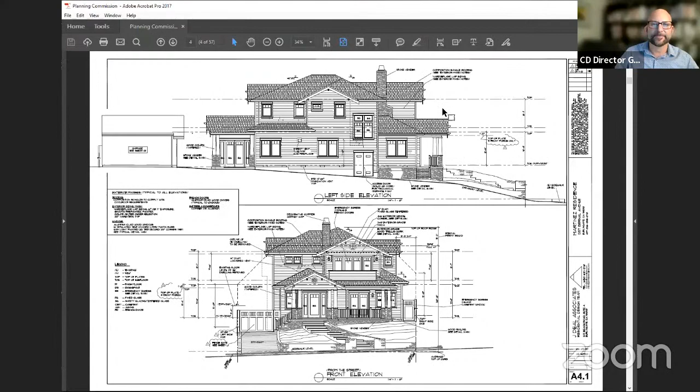Great, do we have any questions, commissioners? Okay, seeing none, then I'll go ahead and open up the public hearing. Would the applicant please come forward and state your name and anything else you'd like to add about your project?

Chair Schmidt, it appears that the applicant is not in attendance. Okay, if perhaps the property owner is available, if he can raise his hand. But I don't see anybody.

So, oh, did I see it? No, it was just my one microphone. Okay, well,

From memory of last meeting, we didn't have a whole lot of concerns. We had some minor comments which were addressed. Unless somebody's feeling like they have a burning question for the applicant that isn't here, can we not move forward and make a motion on this one anyway?

That's correct, you do still want to check to see if there's any members of the public, but then you can close the public hearing.

Okay, so since we do not have the applicant in attendance, if there's anyone else who wishes to speak on this item, please raise your hand now. Otherwise, we'll close the public hearing. Okay, not seeing any hands, I'll go ahead and close the public hearing.

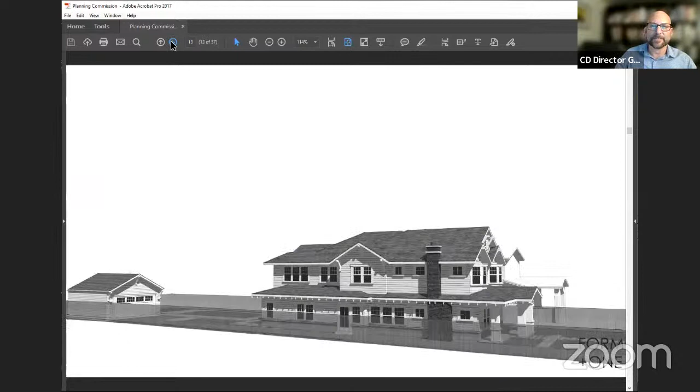The applicant proposes to replace the existing two-story single-unit dwelling and detached garage at 121 Occidental Avenue with a new two-story single-unit dwelling with a detached garage. The property currently contains a swimming pool that is proposed to be retained and refurbished under a separate permit. In summary, the applicant is requesting design review for a new two-story single-unit dwelling and detached garage. The applicant is available for questions, but first I'm available for questions of staff.

Okay, do we have any questions for staff at this time? Commissioner Gall: I know it was not included in the floor area calculation, but the attic clearly has a ridge height of close to 8 feet and a lot of space up there that's over 5 feet. Is that not included in the FAR?

I'd want to look at the exact plan check. Generally, if the lowest parts are not counted, and then if there's any part of the height that is... I'm blanking on the ceiling height threshold when we start counting, but parts of that would not be counted.

Yeah, I was just looking at the section on sheet A4.0. It looks like a big room up there to me, but I don't know if that should be counted, or if it, I don't think it was counted.

If I may say, generally we don't count attic areas unless they're accessible from the interior with a permanent stairwell and they're more than 5 feet in height. Would that include a pull down stair? No, if there's a pull down stairs, it does not get counted. It has to be a permanent stair. Okay, thank you.

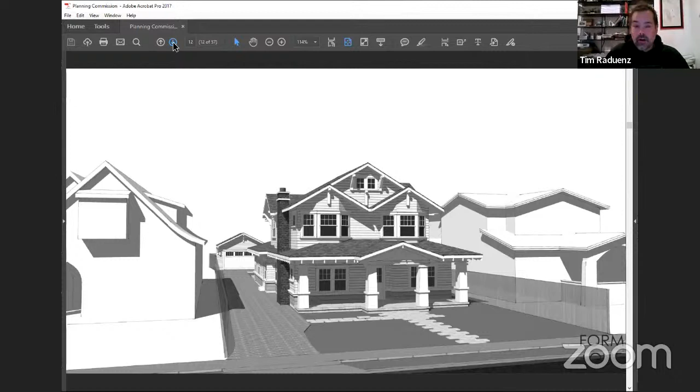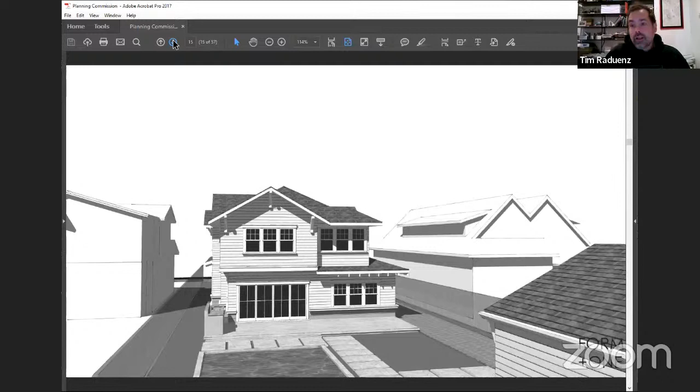Neighborhood outreach has reached all the neighbors connected to this property. We haven't gotten any negative feedback. I'll just kind of give it up to the board for your comments, and we'll come back with a better submittal next period. And to comment to Commissioner Gall, we'll draw that attic as an actual truss.

Normally we put the furnace in there because that's a good space for it, but we'll show it as per the city regulations. Currently it's not included, and it will not be a finished space, even though you do see that there's windows up there. That's more of an architectural look that we're trying to obtain.

Lastly, we're trying to keep the pool existing. We would definitely refurbish it, but a main selling feature for this house is that pool. So, if you have any questions, I'm here to answer them. Thank you very much.

Great, thank you, Tim. Do you have any questions for the applicant at this time? Commissioner Gall: Yeah, thanks, Tim. I did see that you had it look like the furnace and the water heater under the stair landing. So that was kind of... Well, yeah, we would do two furnaces, one for the upstairs and one for the downstairs. Okay, so you don't have problems with dampering on the zones. Right. Okay, no, that's fine.

Actually, my main question is on the landscape or the site plan. The interesting lot that it had garnered a little bit of that back space, but my question has to do with the neighbor in the back. Are they actually... I'm not sure if I'm reading the plan properly, but is the fence going to stay where it is, or is the property owner, your client, going to give up that 5 feet or so that goes in a triangle on the back? Because there's a planter back there.

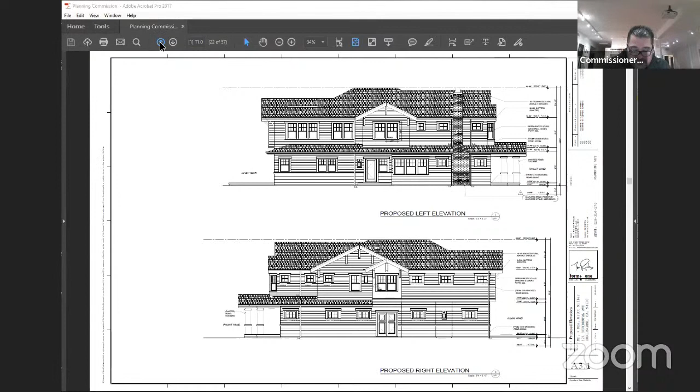My other question is, if we could look at the front elevation and compare it to the rendering - I'm looking at the attic windows in that gable. What's shown on the drawings seems a little fussy, but what you had in the rendering is better because the windows are a little wider and more square. They look like attic windows. My fear is the narrow windows shown on the proposed front elevation - by the time you get that from the window manufacturer, they're talking you out of making those windows that narrow, and something changes. The way you have them here, they're a little bit wider.

Definitely the 3D version is better. So if you could take a look at that and revisit it. The other thing is it's looking really fussy with the 3 knee braces - I don't know if it needs that much work, it looks like it's trying really hard. In my opinion, 2 knee braces on either side of the windows are sufficient. If you could take a look at that when you revisit the window sizes, I think these square ones like on the rendering work best, but I'll leave it to you to revisit.

Thank you. My one last comment is I'm really impressed with the front porch and those porch columns that are really substantial. Looking at the plan, I'm assuming they're about 1'9" square, which I think is great. I think it's important for the impact of the front porch to have enough gravity relative to the upper floor, so I really hope that detail sticks with those front porch columns. That was it for my question.

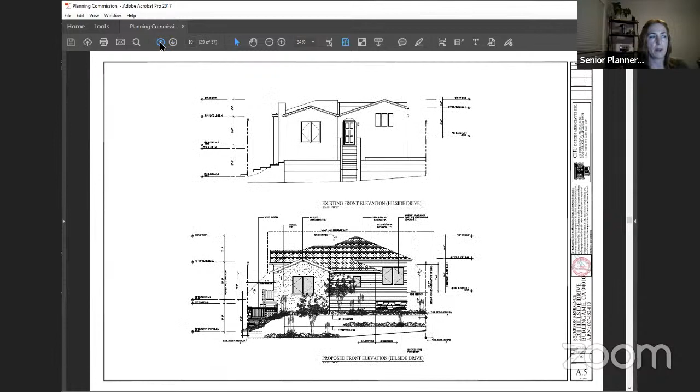The applicant is also requesting a variance for a proposed front setback of 15 feet 4 inches, where the required front setback is the average of the block, or in this instance, 20 feet 1 inch. The proposed project includes an attached one-bedroom ADU at the rear of the lot, and both new entries for the main dwelling and the ADU will face DeSoto Avenue. That concludes the staff report, and I can take any questions.

Great, thank you. Do we have any questions for staff at this point? I have a question: given that the entrance is now moving from Hillside Drive to DeSoto, does that change their address, or how does someone know they're on Hillside Drive and where the address is located? Yes, the ADU will be required to have the same numerical address but alphanumerical, with an A after the address, and Public Works will require they change the address to DeSoto Avenue for both the main unit and the ADU. Okay, then the location of the address will be fine. Okay.

Then if we don't have any further questions for staff, I'll go ahead and open up the public hearing. Would the applicant please come forward, state your name, and tell us anything else about your project? Hi, James Chu, Chu Design Associates. We actually already applied for a street address change with the Public Works Department, so the new address will be on DeSoto. This is a major improvement to an existing two-story.

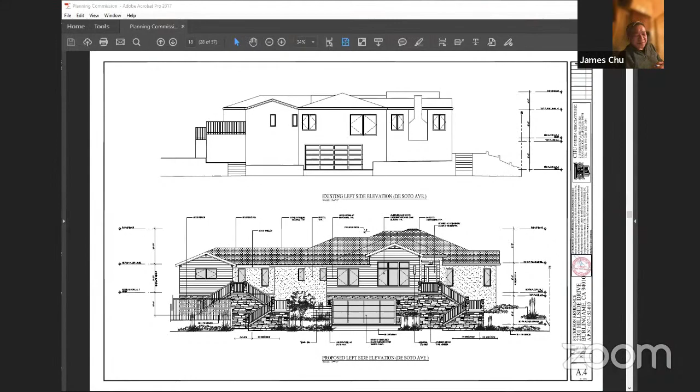Commissioner Tse. Oh yes, hi James. Just a question about the northeast corner of the lot, near where the ADU is, there's a series of trees there, and I don't see anything in the report about what's being proposed for the trees, whether they're being removed or maintained and built around. Can you shed some light on that?

So I see, what is it, the site demolition plan. I see there's a removal of one tree. Oh right, but there's a whole cluster of trees there. I don't know, is it a multi-branch singular tree? It's quite thick and dense in that corner. It's somehow not showing on my plan, but I think our intention is to keep them.

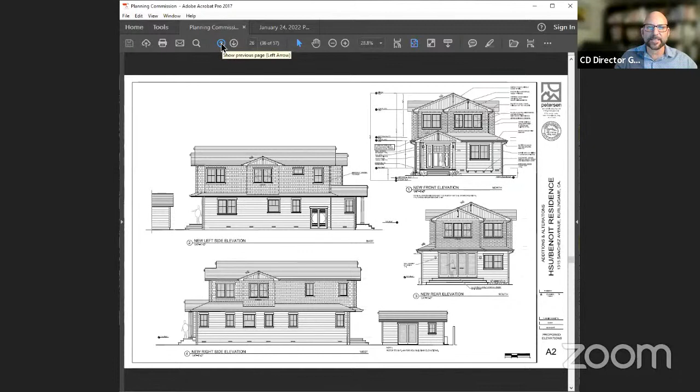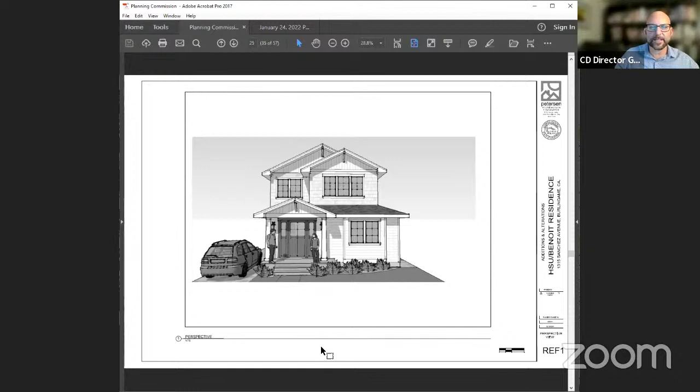Prior to the action hearing for this project, the architect will revise the plan to include one additional 24-inch box landscape tree within the property boundaries. As a reminder to the public, review of the ADU application is administrative and not subject to review by the Planning Commission. Staff has determined that the ADU does comply with the city's ADU regulations. In summary, the applicant is requesting design review for a new two-story single unit dwelling. The applicant is in attendance to answer questions, but first I'm available for questions of staff.

Great, do we have any questions for staff? Okay, seeing none, I'm going to go ahead and open up the public hearing. Will the applicant please come forward and state your name and anything else you'd like to add about your project?

Hi, good evening. My name is Tim Petersen with Petersen Architecture.

Our project is a 40-foot wide lot, 1315 Sanchez Avenue. It's in a neighborhood of 1- and 2-story residences. I'd say the primary character of those houses in the vicinity of our project are craftsman bungalow style. Our intent is to create a house that blends into the neighborhood and meets the program requirements of my client, their growing family. I'm here to answer any questions.

Great, thank you. Do you have any questions for the applicant at this time? Okay, I do have a question.

Can you please clarify the fence along the left side driveway? Today there does not seem to be a fence going most of the way back, and I can appreciate the use of the easement there. But I wasn't able to tell from the drawing whether the intent is to put a fence back along the driveway or not. The intent is to move the fence to the property line. It's in the 10-foot utility easement, which is on the left side of the project, so we're required to move it by Public Works back onto the property line. So what you saw when you made a site visit, it will slide over to the property line.

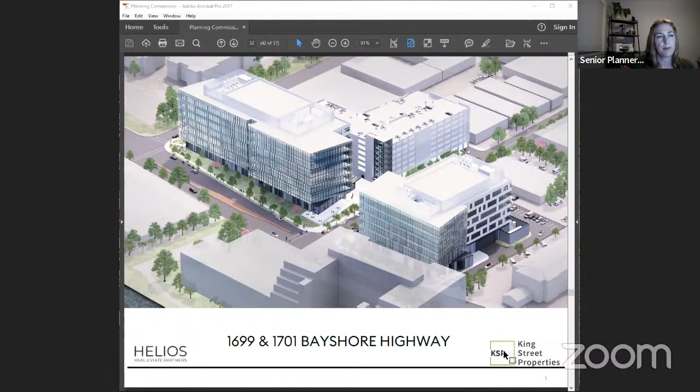I also need to note 3 corrections to the staff report. On page 1, the size of the north parcel should be listed as 1.6 acres. On page 2, the second bullet point should list the north campus as 2.71 FAR and the south campus as 2.23 FAR. And finally, since the preparation of the staff report, the applicant has clarified that the proposed gym and locker rooms shown in the community benefits package on the first floor of the north building are not intended to be accessible to the public, as it states in the staff report. That concludes what I have to say, and I'll leave the rest to the applicant.

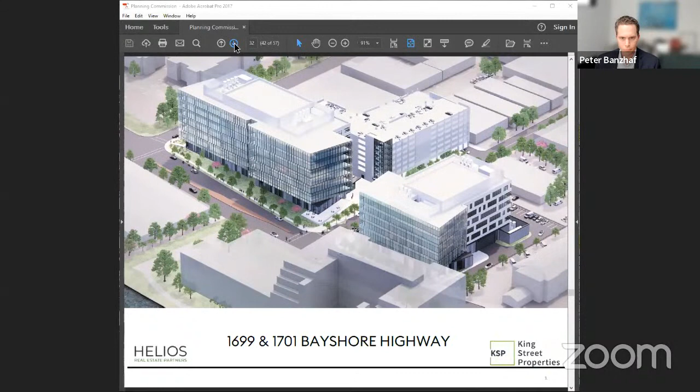Great, thank you. Doesn't look like I'm able to share, unfortunately, Erica. There we go. Thank you, sir. This is our cover page. You would move forward, please.

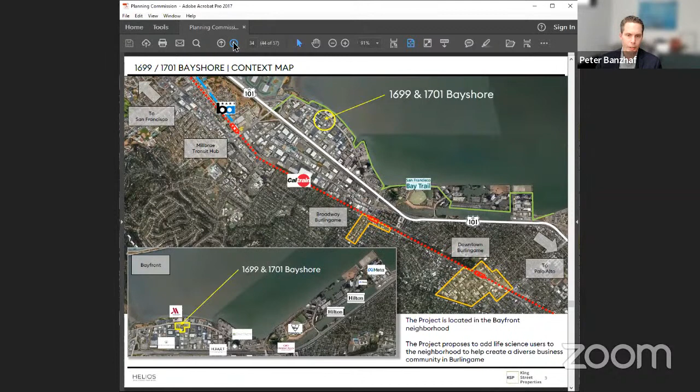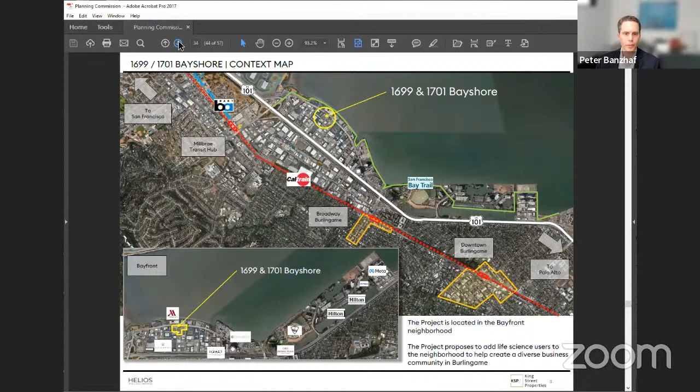Continue, please. As you may know, this is the Bayfront, so it's something I'm sure we're all very familiar with, but we wanted to point out that the Bayfront has a large amount of hotels and existing businesses. What we thought we could reinforce is bringing life science companies, and to do so, we wanted to take the brightest minds in the life science design space and bring them here to form the best team we could. Can we move forward, please?

The existing site is across the street from the Marriott Hotel, and also across the street from the public shore access point of the Bay Trail. In the void of having an obvious sense of place, we wanted to create a very deliberate connection to that Bay Trail because it's so nicely used. Those amenities, the food and beverage and other workplace amenities, hopefully can be a place where people not only from our campus could enjoy, but people from the Bay Trail and other neighborhoods could come too.

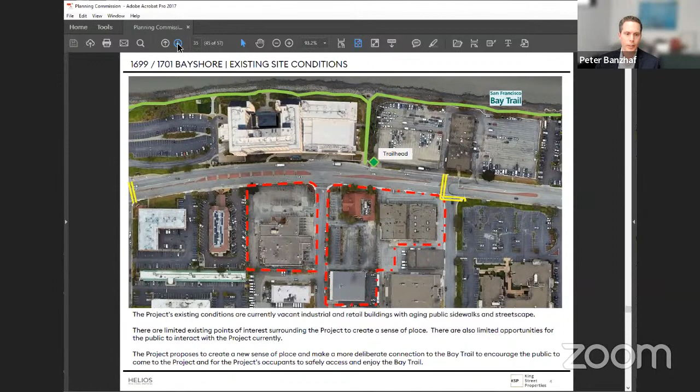Next slide, please. I'll pass this on to Peter Pfau of Pfau Long Perkins Will to speak to the architecture. Good evening, commissioners. Can you hear me okay? Yes, great. So just to get you oriented to the project here, you can see the 3 buildings.

The 2 buildings along Old Bayshore Highway, and then the garage building behind. They're really all about creating a concert between these 3 buildings to create an amazing place on Malcolm. We're cognizant of future plans for Bayshore, and it was clear that the best place to create a place for people to gather and for activity to occur would be on Malcolm off of Bayshore. So these buildings really work together. You'll see as we proceed in the presentation, it's all about placemaking on Malcolm.

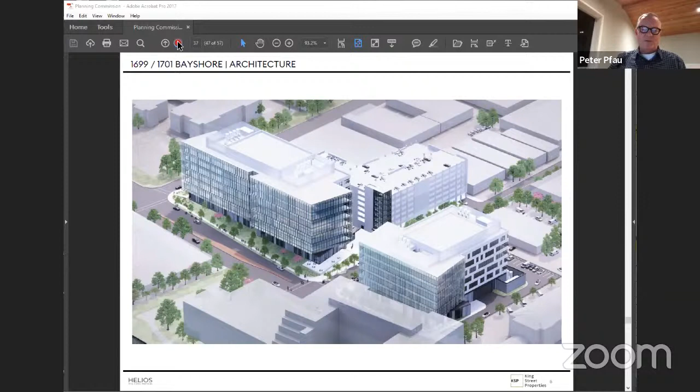The building forms—actually I'm going to hand it over to René to talk about the landscape, which is very much in support of what I'm talking about.

Thank you, Peter. As the staff report points out, there are really 3 primary components to the approach to the landscape here. This environment is huge scaled, very large waterfront, the 101 to the south, the streets were designed for more of an industrial scale. So a lot of our approach to the landscape is to scale down the spaces, place-make 3-dimensionally with the topography and use the building edges to create very memorable spaces. But at the same time, respect the streetscape and the larger regional framework that we're working in within the city.

So there's a main plaza on Malcolm, which is the place-making move. We want to create a place where people, the community, as well as project users or people walking the Bay Trail might want to come, stop, linger, have a cup of coffee outside. A lot of it is about creating edges, but also creating moments and controlling frames and kind of embracing the architecture that's coming. The second component is creating a more robust streetscape.

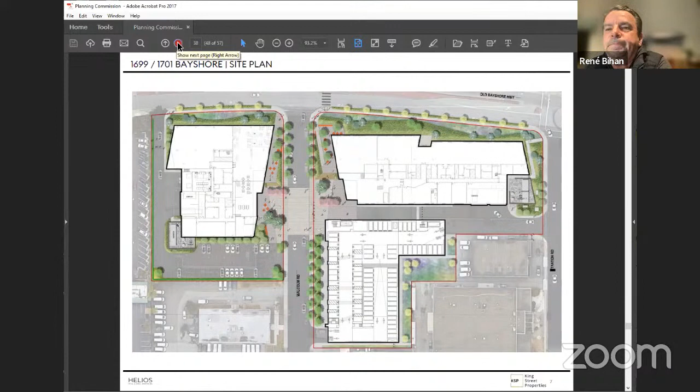And you can see at the ground level, there's a different articulation that's really about creating a very human-centric experience at the street level, about making connections indoor and outdoor. What you can see from the plans is the ground level expression kind of pinches at Bayshore, and as a result of that forms more of a place on Malcolm, while the building above actually gestures the other way, which is really about the view from the working spaces above. So the combination of those creates the architecture articulation. And the articulation of the skin of the building is about reducing the perceived mass as well and making it more human scale.

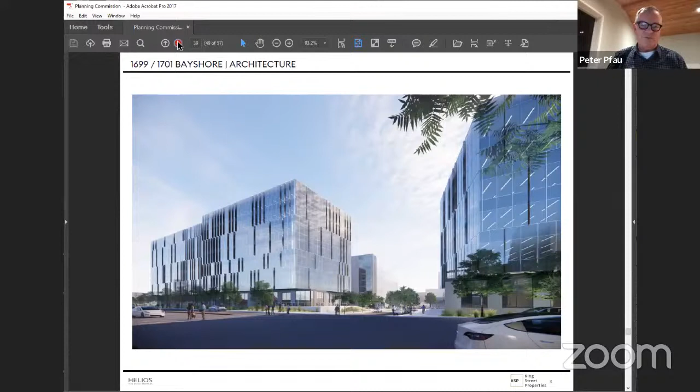Next slide. Here you can see inside the plaza area where the two flanking plazas from both buildings address each other over the activated plaza space. A raised sidewalk condition connects those two plazas and makes them feel like one.

One thing to note is that the building is taking sea level rise and resilience into consideration. We've made the main level of the building up at 11 feet, which is the long-term federal floodplain. But the lobbies themselves are actually down at ground level to make a more generous flow from these outdoor spaces into the lobby. The changes of level create an interesting condition, both inside and outside, that link the experience of those spaces in the building itself.

On the left, you can see the garage structure that has a glassy expression on its stair, encouraging you to use the stair as you move up and down, and then a transparent skin that dresses the garage itself so that you're not looking at a raw garage.

So with that, I'm going to hand it over to Elliot March. We've talked a lot about linking the indoor uses and the outdoor uses to activate the space, and Elliot's going to talk about that.

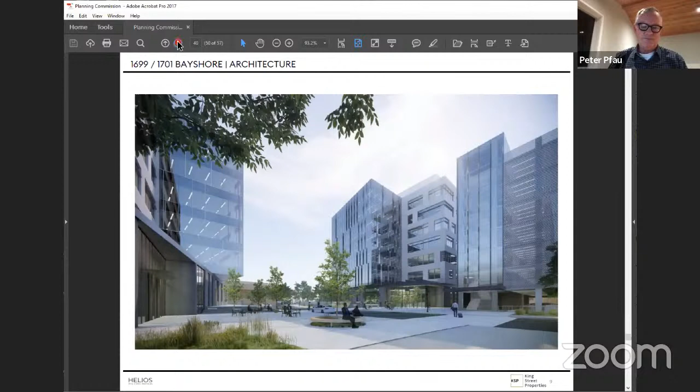The big draw to the scheme here for us was the amount of programming we could do on the amenities, as well as the community aspect of the project that we could engage with from an interior design perspective. We've got a full amenities program to both buildings, but particularly on the right-hand side of the plan there, we've got a really good opportunity to introduce this cafe bistro / grab and go type offering that can really engage with the community.

Having toured the site, the connection to the Bay Trail as well, and drawing the community and people back into the plaza and the project from that corner spoke really strongly to us. We think there's a great dialogue to be had between interiors and landscaping and the plaza, really creating an indoor-outdoor space that people can enjoy, not just during the week, but at the weekend as well. That was a really strong piece that I think we've got to design on the project.

Then really linking that to this all-hands community space as well. During the day, or at certain times, it could be used by the actual building, and then it can flip as well to the community at the same time. A space that can really house a large number of people for an event, a community event, and also break down into different size rooms for smaller gathering events for the community as well, which we thought was really important. Also not tucked away, but public facing, right on the front, right on the glazing, spaces that are really in direct connection with the streetscape.

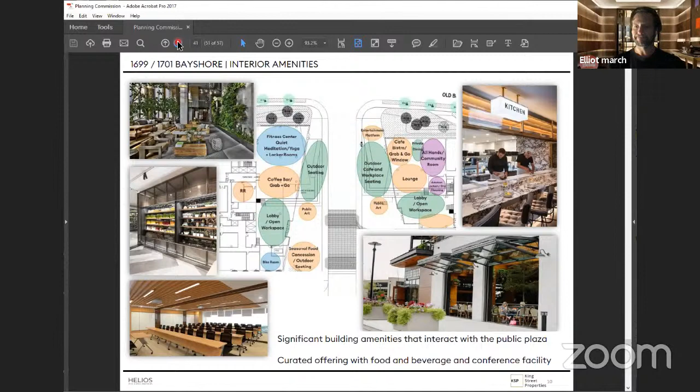Next slide, please. What we tried to do was work with staff to develop community benefits that captured the best parts of our project and made them also part of the community's access. We did that through the three that we were proposing.

Which we've spoken about. Next slide. When we look at them in context on the site plan, it is the entire site. It's not like we're trying to tuck these away into the other regions. It's really in the front, and it's meant to really create that nice sense of place that is connected to the Bay Trail and reinforces itself so that it's something that's timeless and people can enjoy, beyond just this generation.

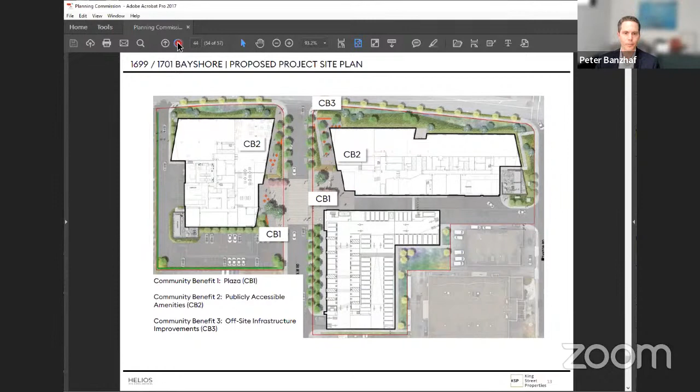Next slide. As we spoke to various aspects, we do think that the plaza can be programmed. I know that SWA and René has experience doing these on very large scales. So while we probably will never be able to repeat downtown Burlingame's farmers market, perhaps there's an offshoot of it, and trying to find ways to activate the bayfront on the weekends when it's not as popular as a workplace destination.

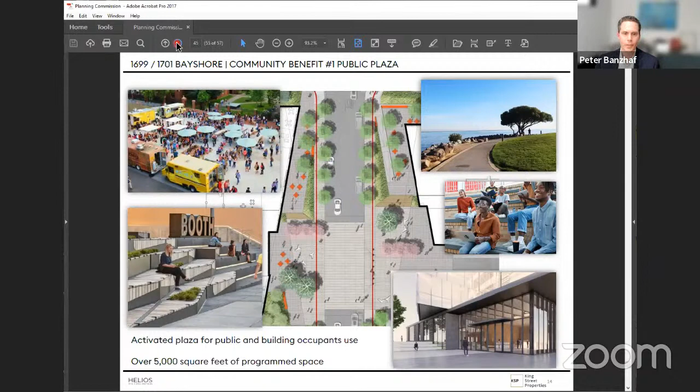And as Elliot pointed out, we really are trying to develop a Class A asset here that everybody can enjoy. So we're very focused on finding what is not current today, but what's going to be current well into the future, and be able to be flexible around it. So make sure we have sea level rise accounted for, create spaces that are high-end, and make that all available to the public. Granted, we'll have to have limitations around the fitness center.

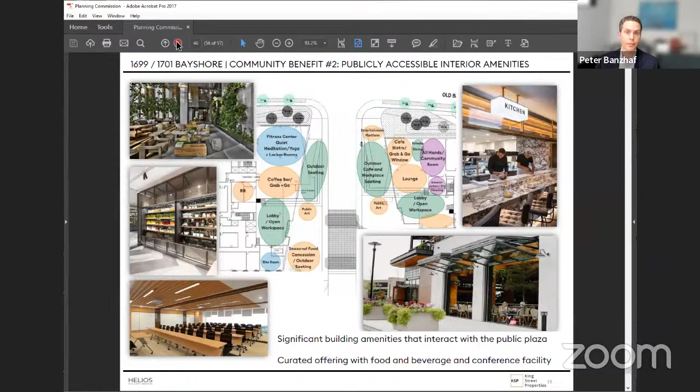And one of the main considerations we wanted to pose to the commission is we've studied, at a very high level, some traffic impacts. As we develop our project further, we're going to continue to work with staff on the full impact assessment. Early indicators show us that the signal at Stanton Road, which is a key piece of our parking garage, is a robust signalized intersection. However, we still want to have that direct pedestrian safety corridor to the Bay Trail, and that would require a protected pedestrian crosswalk.